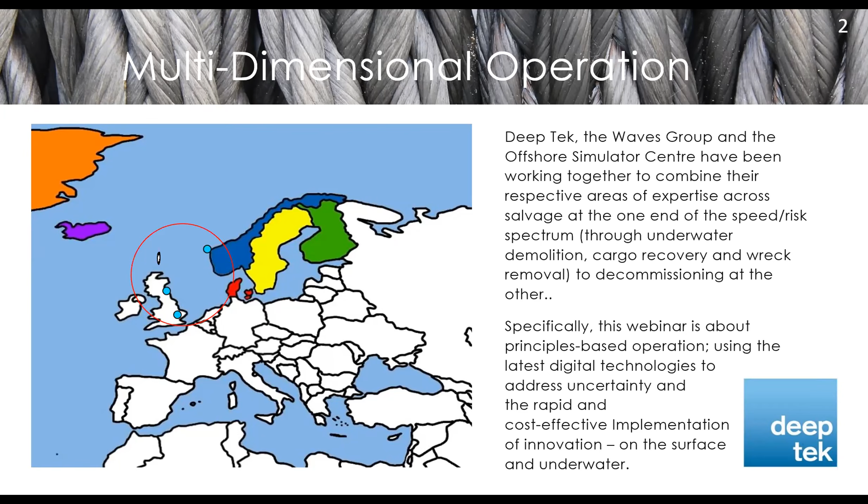But really what we want to do is show how salvage as an undertaking, with its basic principles—that it's of success, danger, and being a subject of salvage—really makes salvage an undertaking. It's like science, it's not just an activity, it's an undertaking. So we're going to take you back.

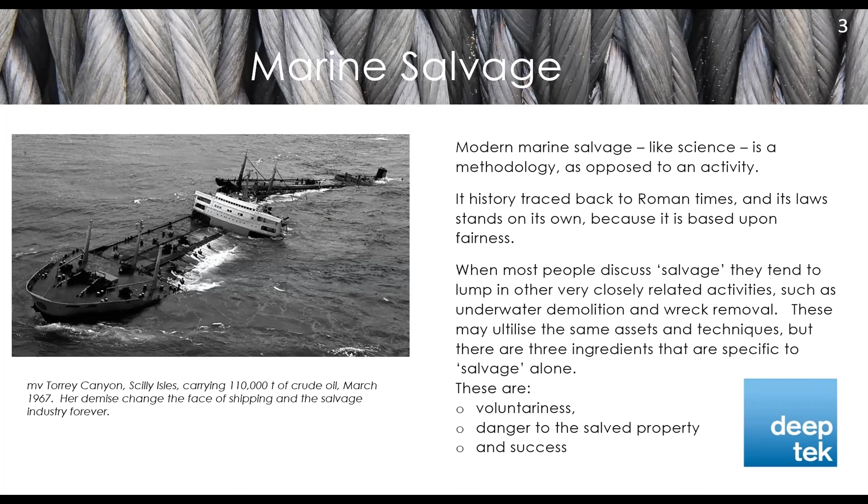This is a wreck called the Torrey Canyon. For those of you a little older in the tooth like me, this happened when I was a child. The Torrey Canyon, a tanker grounded on the Scillies in 1967, transformed shipping and salvage. It transformed salvage because Wijsmuller, the family company that responded to it, responded on no cure, no pay. And when the British government, when the RAF, after significant tries, bombed this wreck, they actually bombed the principle of salvage, in my opinion. But these wrecks are each taken on a case-by-case basis, and you can see how salvage changes over the years and is changing now.

And so in showing some of the past, we also want to show you the future. The Deepwater Horizon, again, is another wreck. Many of you will remember that from 2010, when she became a wreck—this is her being responded to as a casualty. She was responded to under the commercial agreement of no cure, no pay, and she is treated here as a ship. So you immediately see that for us, the oil and gas sector doesn't sit on one side and the maritime sector on another. We merge them together, and so the techniques you'll see on the surface and beneath the surface are merged as well.

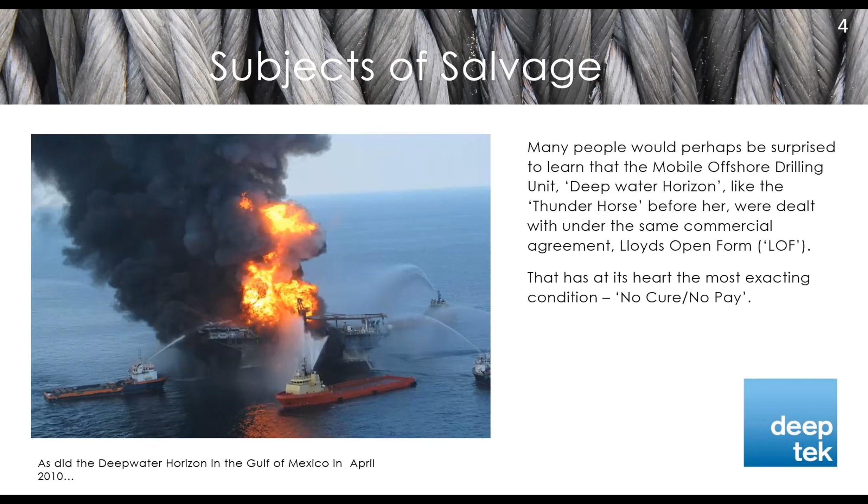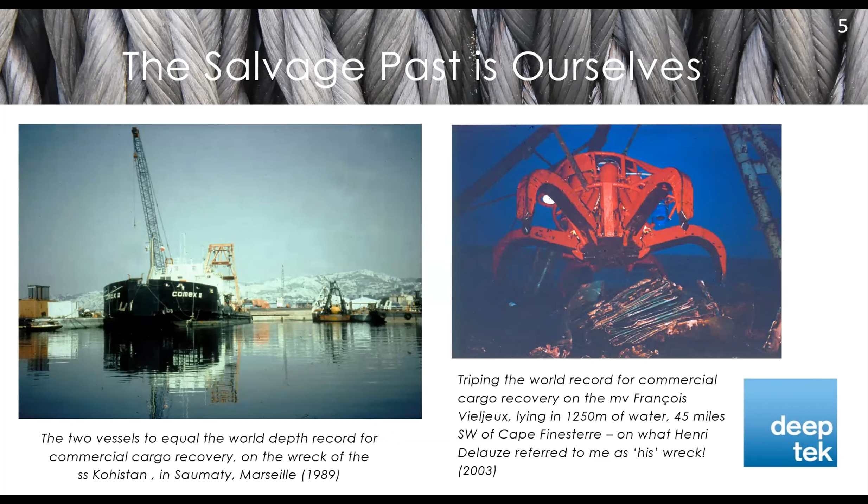My particular form of salvage has been cargo recovery. We've been quite a strange company. Our vessel, Redeemer, when we had our own vessel—she is the vessel on the right. With this tiny vessel we went on to triple the world's depth record for commercial cargo recovery. That was 1,250 meters of water, which was probably staggering enough, but it was also 45 miles off southwest of Cape Finisterre in the Atlantic.

And then we went on to work a wreck, finding it first—the wreck of the SS Persia. For me, that finding of a wreck was always very difficult. The Persia had three positions of loss.

She was sunk in 1915. So we first had to find our wreck, and from the positions we were given, that was anything that she may have lain in 2,000 to 4,000 meters of water. She happened to lie in just under

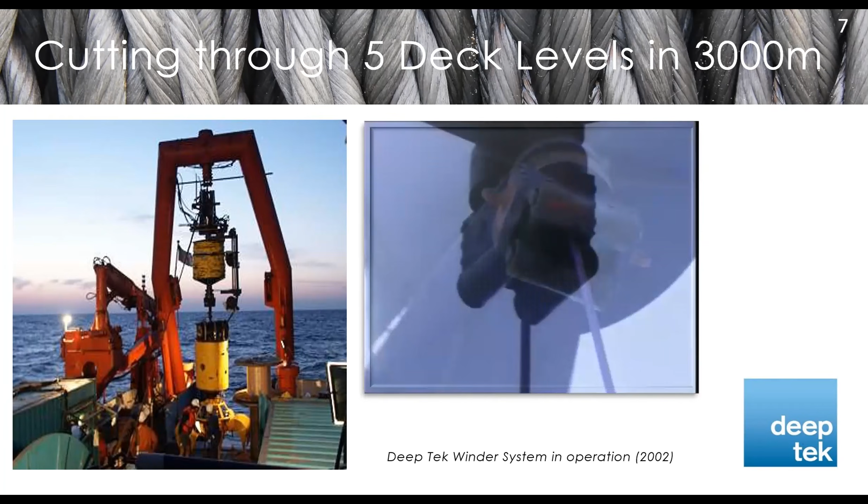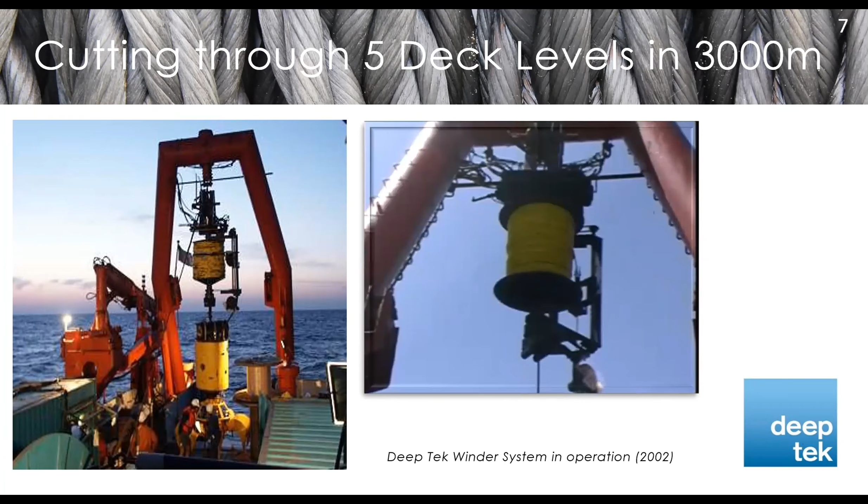This winder system was never used anywhere in the world before. We built it and got it working on the vessel. This is the use of high modulus polyethylene as a tension member, now 20 years ahead of where the oil and gas sector still is. What you see here is winding power and signals around that high modulus polyethylene, which is weightless in water, so that we can operate the industrial equipment on the left-hand side.

That grab has 200 tons closing force. In order to reach the bullion room of the SS Persia, we had to cut down through 5 deck levels and remove hundreds of tons of overburden to get to the bullion room, which was built in feet - 20 feet across, 8 feet deep and 4 feet wide.

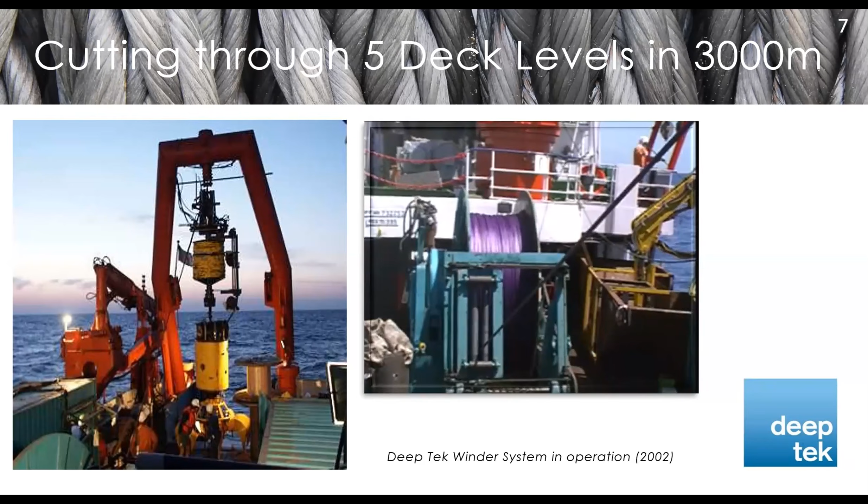Not only was this, in terms of technology, about being able to find this wreck and get our equipment to work from it, but even at this time - the beginning of the 2000s - to get the video images we got, we had to change almost overnight to single mode fiber optics. So you can see how having better information would have completely changed how we worked.

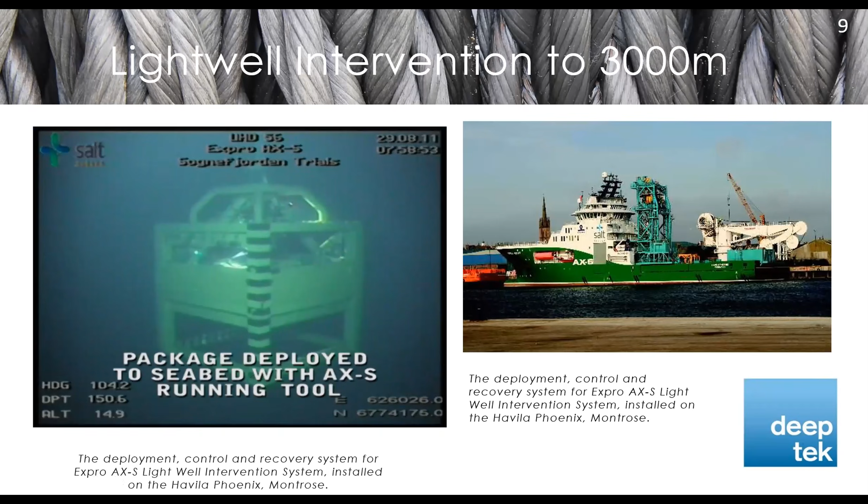So this is why I wanted to bring these 3 talks together. I'll show you on the left-hand side a very quick video, which shows how technologies meet together, as a company, as a salvage company like many others who work absolutely on first principles, and our technologies were

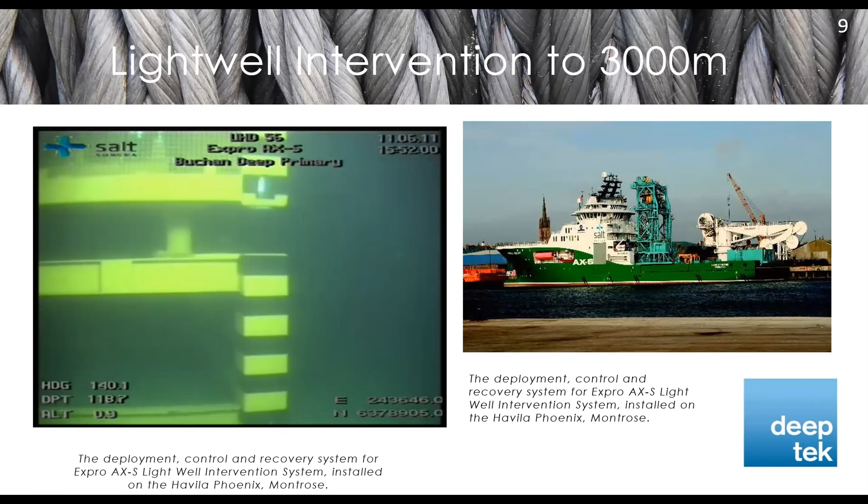taken and we became the contractor for a £10 million design and build contract for lightwell intervention down to 3,000 meters of water, which was the leading edge of oil and gas. So I really wanted to leave you and pass you on to Mark, showing that from salvage on basic principles, on very, very hard contractual agreements, it's absolutely married to innovation.

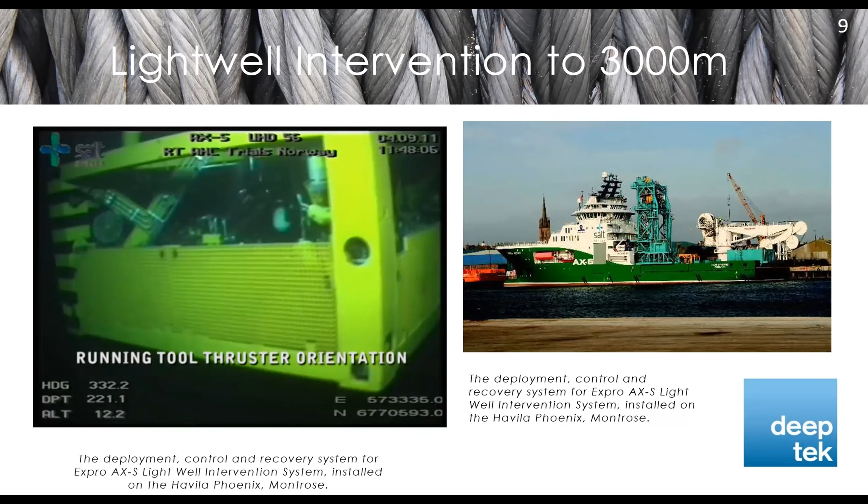But I would have liked to have the technologies that you're going to see next - it would have revolutionized our work on the Persia. And I'm just going to stop sharing now.

Mark. Hi, can everyone hear me there? Can you hear me, Moya? Great, okay, and hopefully I'm sharing screens as well. Can you give me a thumbs up that that's working?

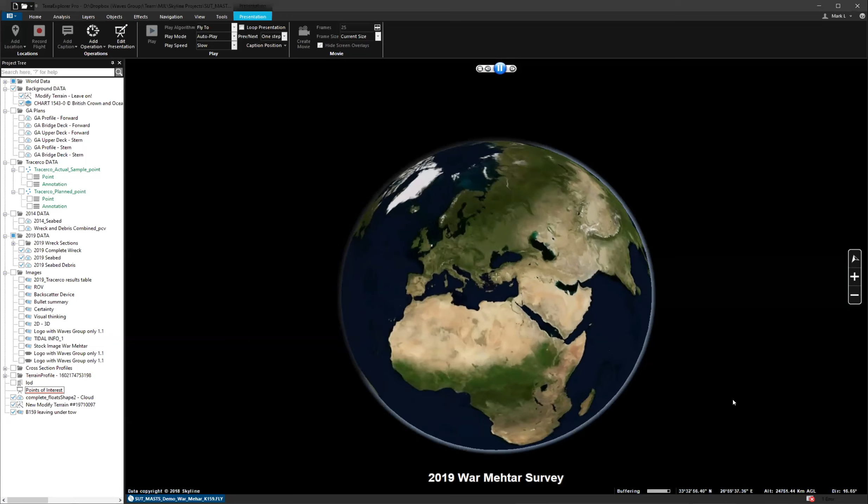Okay, so just carrying on from where Moya left off, what I wanted to show you today was a case study, if you like, of a number of wrecks. I'm going to start with a wreck off the east coast of the UK called the War Mehtar. This is a project we did for the UK MOD last year, and it was a so-called legacy wreck. It was sunk in the Second War, containing significant quantities of oil, or so we thought, and therefore was a pollution threat.

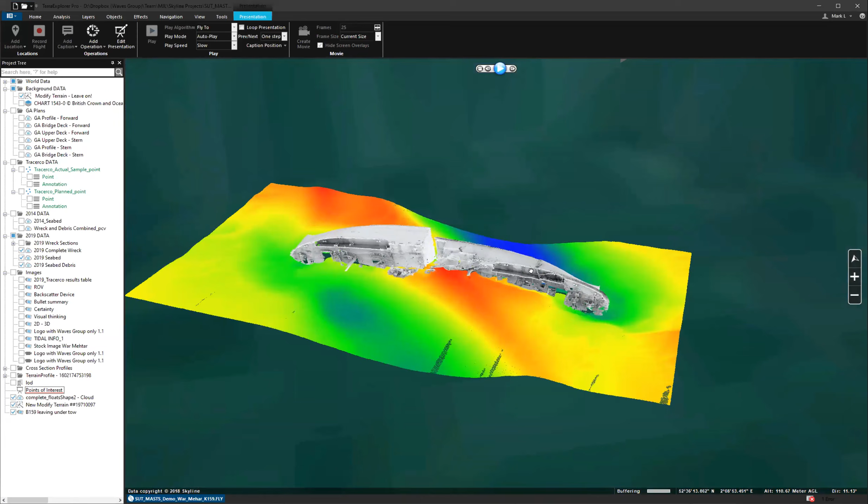So what I want to do in this presentation - I'm actually running a GIS package at the moment, so I'll just pause it - was to show you some of the techniques we're using for acquisition of three-dimensional data, and more importantly, how we're using that data for intervention strategy, for our ability to increase our situational awareness, improve communication and collaboration.

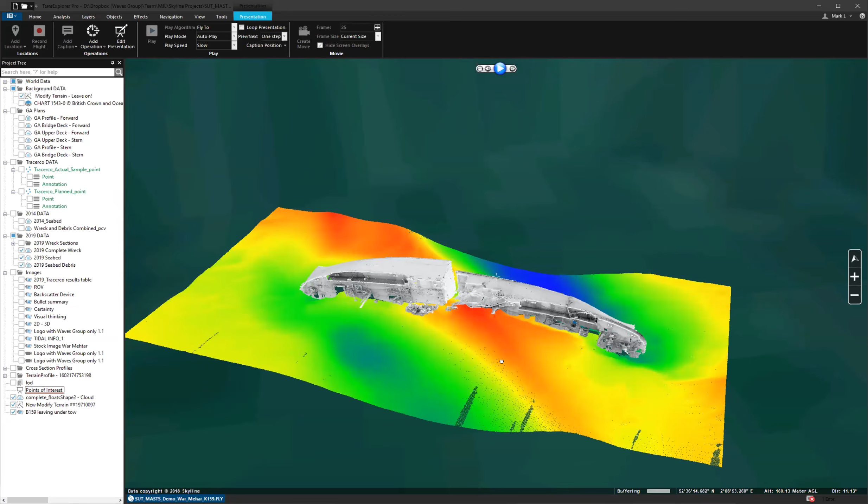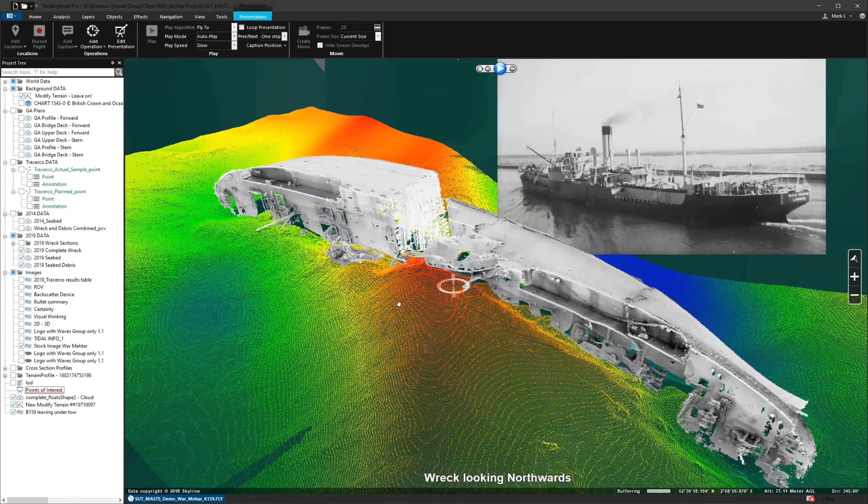So I'll just add in an image here, hopefully, of the War Mehtar. What we're looking at here is the wreck of the War Mehtar, lying on its port side in about 50-60 meters of water. The wreck is a legacy wreck which sank in 1941, thought to contain significant quantities of oil because when she sank she was more or less intact, having suffered a torpedo strike to the port side from a fast torpedo boat. She did sink with significant quantities of oil on board at the time, so it was always a worry that there was significant oil remaining on board, and therefore a pollution threat.

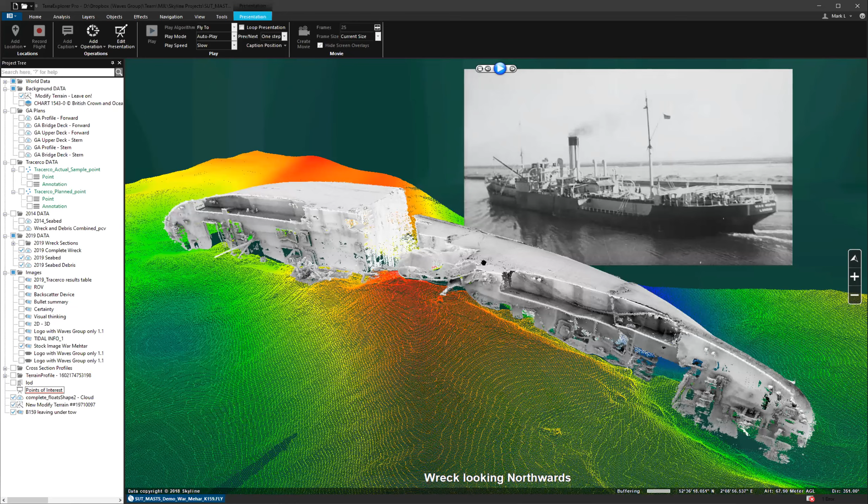If I then swim round to the other side of the wreck, hopefully you're getting this.

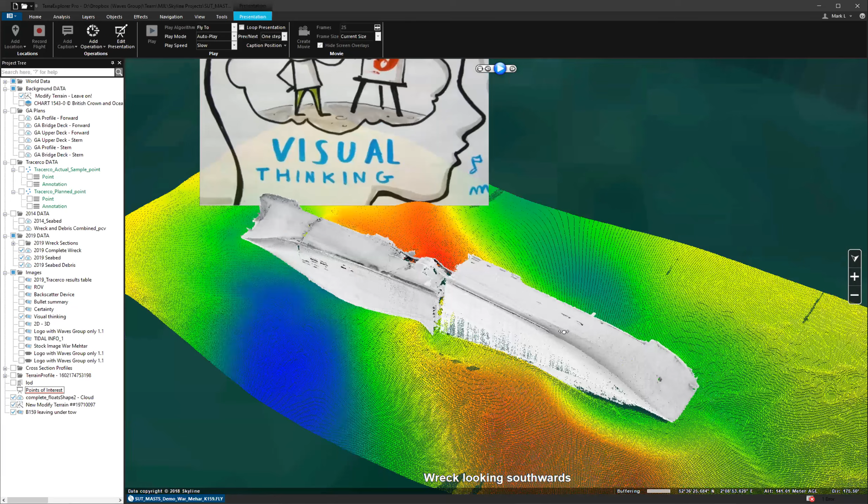I wanted to make a couple of points about this sort of data. We all, as humans, think in three dimensions, and that's no surprise, as we live in a three-dimensional world. Without me describing too much about how the wreck is lying on the seabed, the use of this three-dimensional data already gives you that level of understanding. In our profession, we're still making use of two-dimensional information in terms of static reports and the like, but it's only when we get into three-dimensional data that we can really begin to add value to our level of understanding.

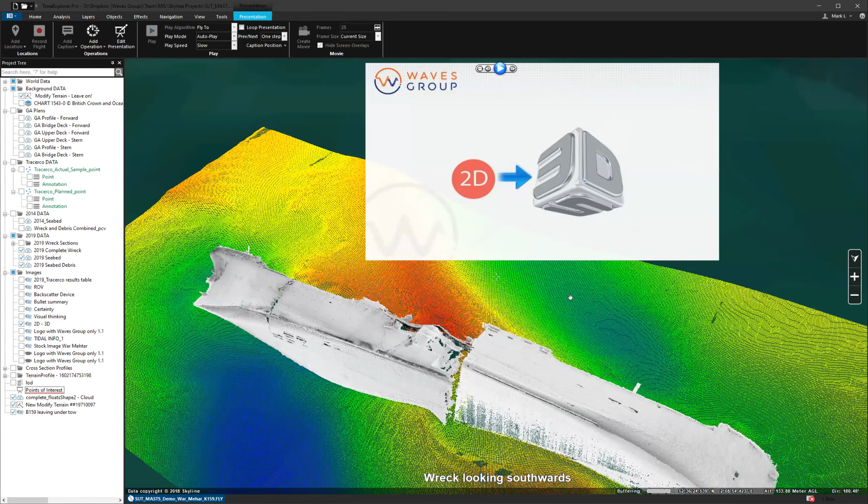In this particular case, without the three-dimensional data, we couldn't have planned the sampling regime that we undertook to find out if there was significant oil remaining on board.

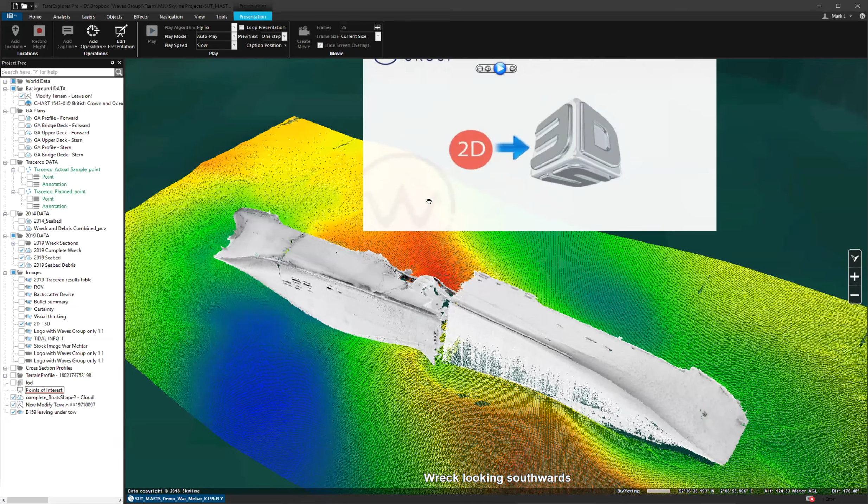The other point I wanted to make is about certainty and the value of this sort of data, especially at the beginning of projects, where we can essentially remove the water and have a good look around this wreck and understand it in a way not possible by any other means. That really does increase the certainty of outcome, because we can understand exactly what we're dealing with in terms of situational awareness.

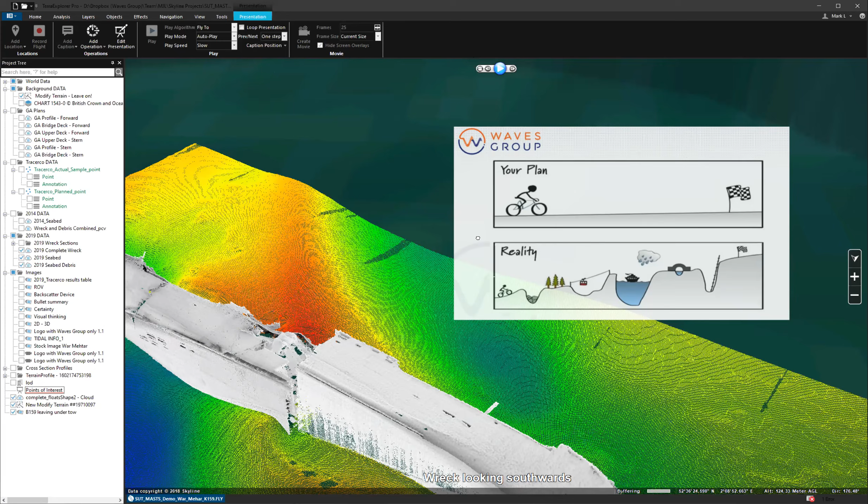In this particular case, the level of resolution was sufficient using multi-beam sonar. So here, what you're looking at is actually a point cloud data set acquired using remotely operated vehicles with a multi-beam sonar system. Because of the resolution of the data, we were able to accurately overlay GA plans on top of that data set.

That effectively has allowed us to position the areas of interest. I'm just going to pause that there.

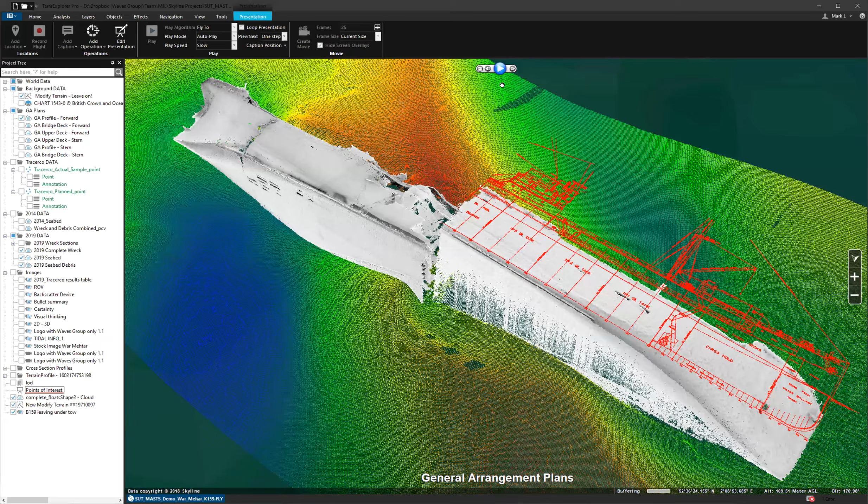In our case, we were interested in the oil tanks, where the oil was stored while she was afloat. She was a fleet tanker, as I've said. So here we're looking at holds number 4, 5, 6, and 7, and we were able to undertake a sampling regime.

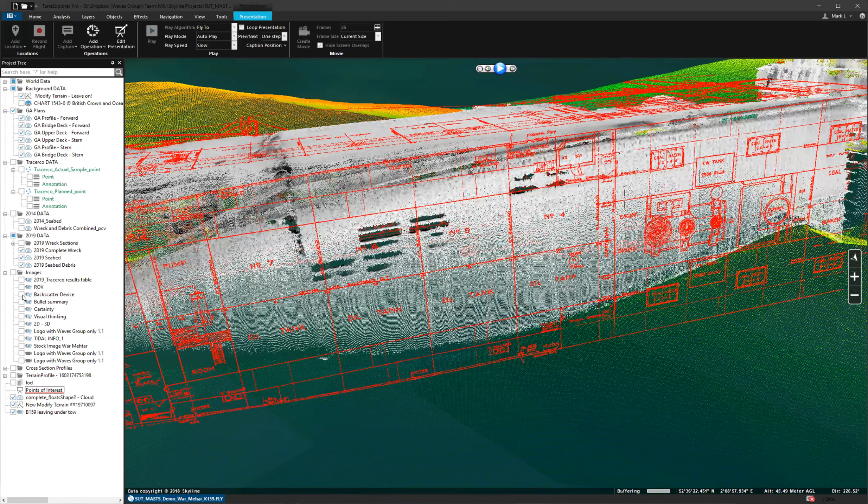If I just pop this image on here, we undertook a sampling regime using a neutron backscatter device handled by the ROV. But it was only because we had the high resolution data set and the GA plans that we were able to accurately position that device.

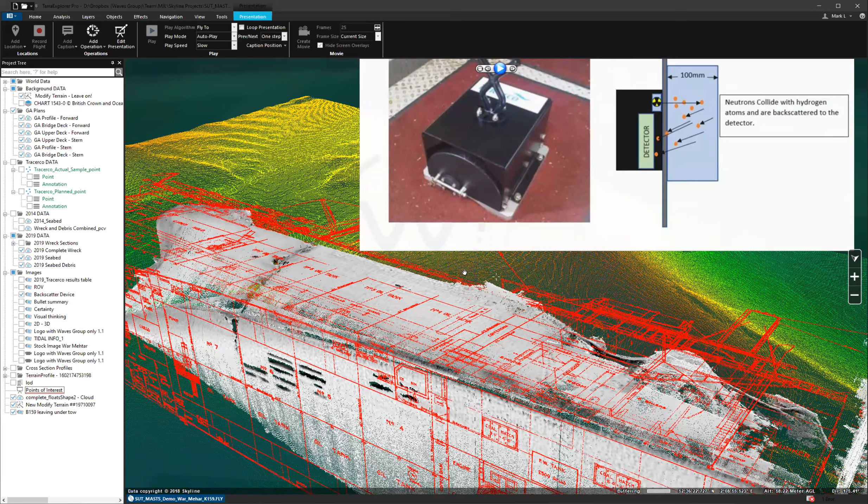I'm going to cut that a little short now since we're pressed for time with Joel, because even though we didn't find oil on this particular wreck using this sampling regime, had we found oil, we would have been into a whole different situation trying to understand cost and implications for getting that oil out.

This is where it would have been really useful to have all this data within Joel's simulation package, to understand the implications of all the different types of operations that would be needed, and to try costing those in a simulation package.

So I'm going to stop sharing there and hand over to Joel briefly, and then I'll be back to show more examples of this sort of data.

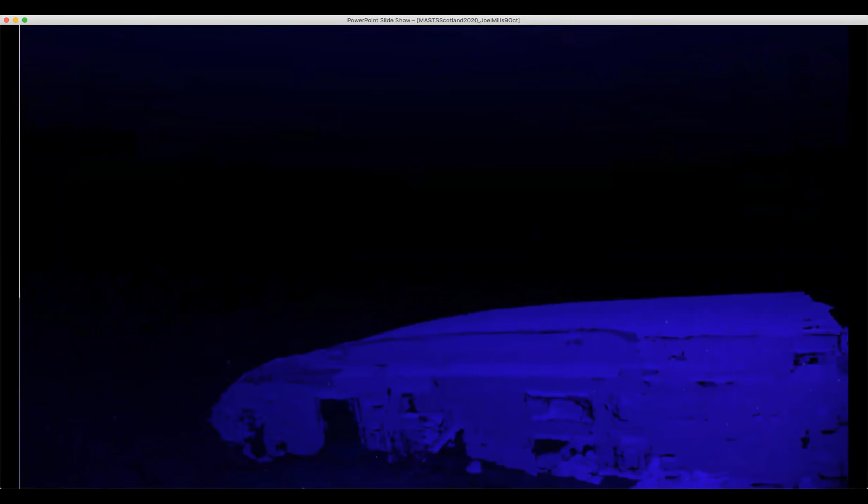So again, some pictures of the simulators, but what I want to start off with is Mark has been showing you some really good quality data acquisition, some really good point clouds of different wrecks, and he's going to show you more about that. The one he showed you was the War Mehtar wreck. Now, technology has been progressing a huge amount. Mark was able to give us that point cloud, and we were able to use some software which, within under an hour, converted that point cloud into a solid mesh. A point cloud is basically like a ghost showing you where everything is, but it's just a visual. We can turn it into a mesh, which makes it a solid object that we can start to look at and do things with.

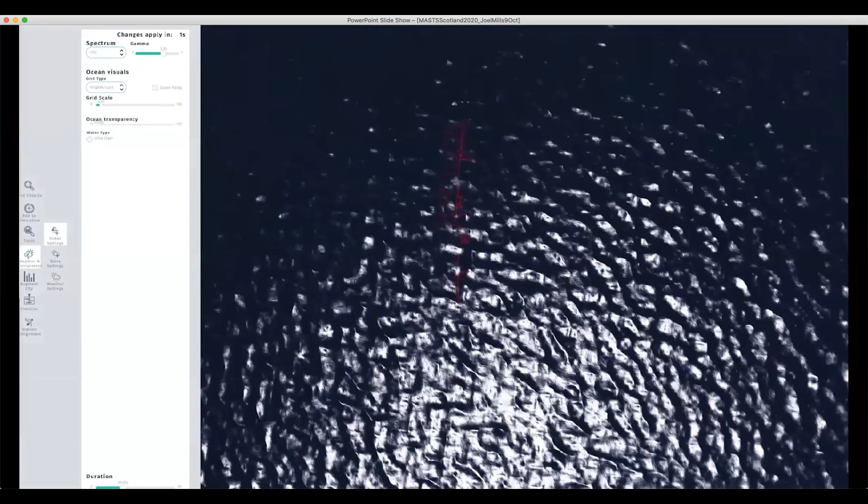So we're able to put this in the location we needed, directly on the seabed. We put the vessel into place, and then overlay all the different bits of equipment we want. We're then able to use our sandbox product, which we've developed for working with this and building up simulations at very high speed. It's basically like building Lego blocks, but you can build in things. So in this example, we've thrown in an offshore vessel, and we're going to show how we do what Mark talked about and understand how we go down and do observation on that vessel.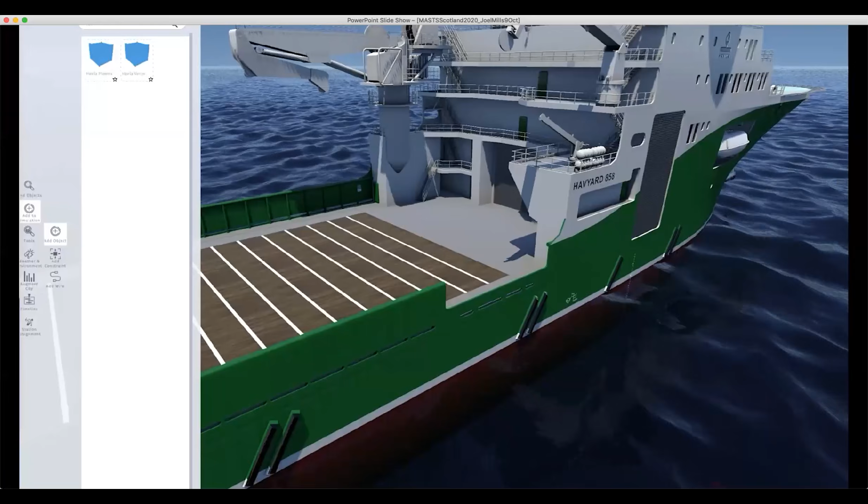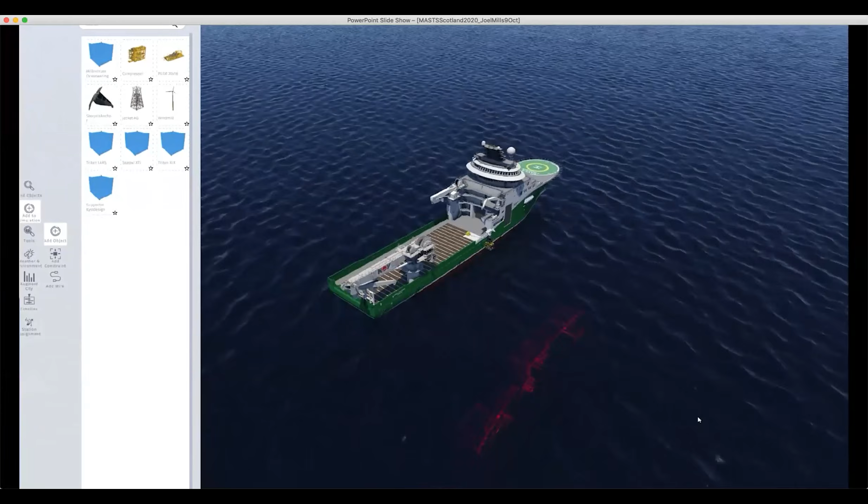So we pick out a large system with an ROV on it, and we place that on board this vessel in the right location. We're able to move it around exactly like a Lego piece, placing it into place. The minute we place it, it goes from that ghost view to a solid view, and all of the physics becomes correct. So the forces coming from the waves to the vessel are correct.

And now what we're going to do is show some situations to understand how this vessel would perform in different wave conditions, different directions of current, and wave heights, to be able to do that inspection operation with an ROV. So we can quickly, using simulation, understand the possibilities of what can be done in one place or another, and what sort of vessel you need to do that.

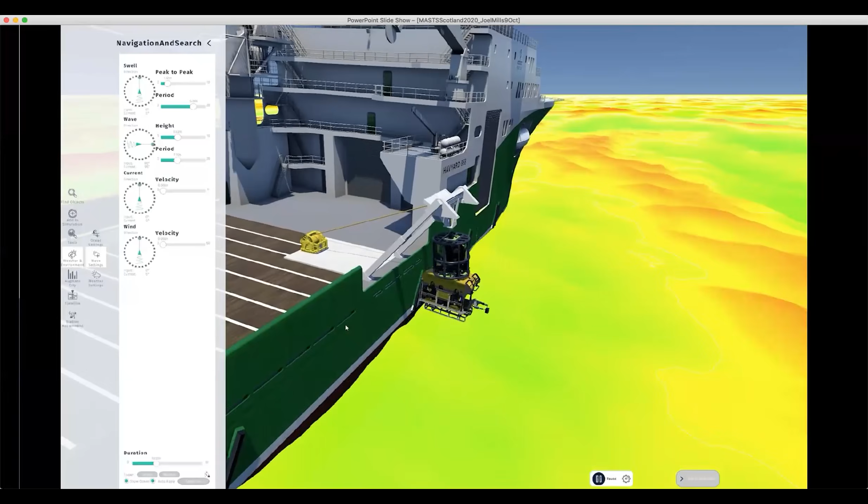So here we're showing the waves going up, and actually we put the waves too high in this example, at 90 degrees to the vessel, so you start to get a real roll of the vessel. Suddenly you see that ROV swinging around so much that it's actually bashing into the side of the vessel. Now that's not a condition you'd ever want to launch that ROV in, but we're just showing how we can control all of the attributes, and this isn't just an animation, it's all based on real physics.

We have over 100 different inputs into the waves here, which give the forces to the vessel, and the hydrodynamics are calculated there, then feeding the forces through all the systems to the launch and recovery system for the ROV.

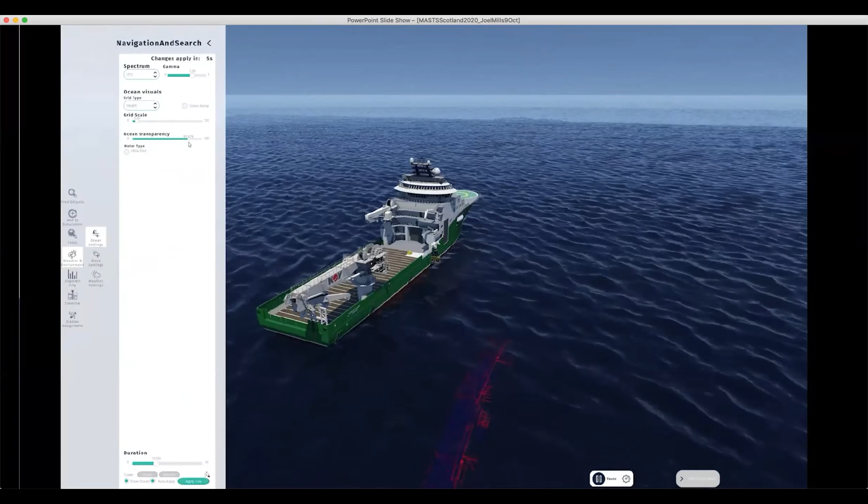But the wonderful thing with simulation is we can do things that aren't possible in real life. So we can do what we call augmented simulation, where we're able to change things, like turning the water off so we can see exactly what's going on. This is a view you'd never be able to have in real life, but in the simulation you can do this to really understand what's going on.

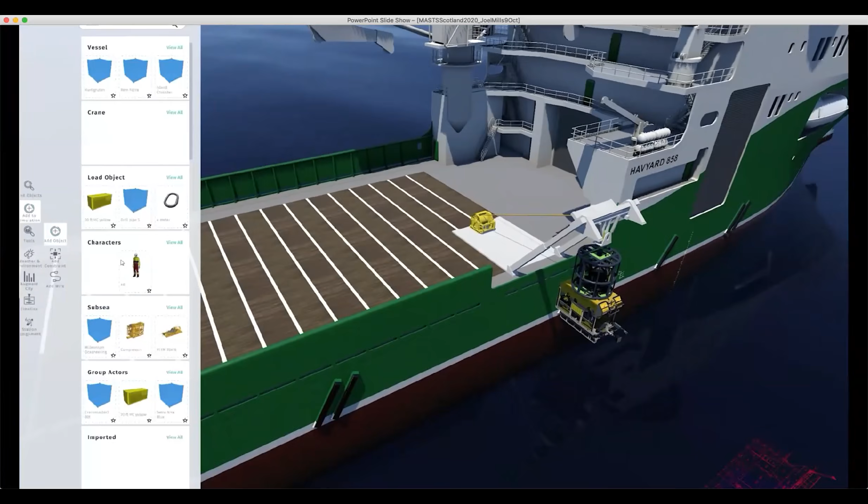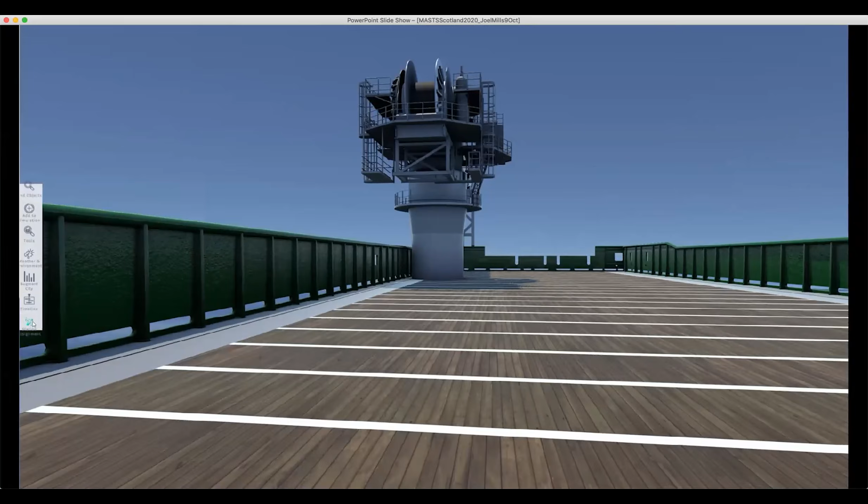We can also go down to the perspective level of a human, place somebody in, and even take control of that person, so we can understand exactly how this will be from the human's perspective, which is very important. We're able to walk around, take control of that person, and step into his shoes, so to speak, and look around. This deck of a vessel is completely empty, but we can assign ourselves to that person and look at things directly from that perspective, understanding exactly how an operation is going to be performed. So we're able to look at things from the detail of the people involved.

We're able to take control of any of the objects, so we can jump to the vessel bridge, we can jump to the ROV cameras, and we can understand things from all of the different perspectives. But we can also take this world view where we're able to fly around and see things from a different direction.

So we've lowered the ROV through the splash zone. I've actually skipped a bit here because I didn't want you guys to wait while we did all the lowering. So we start lowering the ROV down, but in this case we suddenly jump to the point where the ROV is down by the wreck, because I wanted to keep the video short enough to show what's going on.

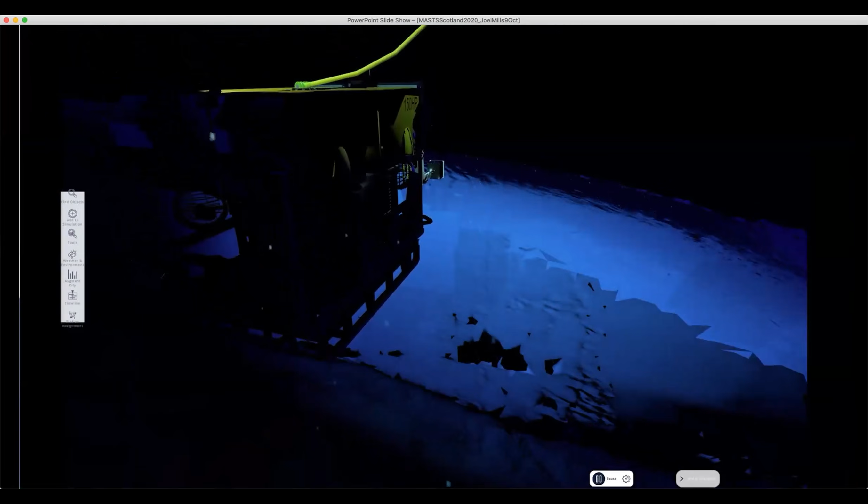So now we're the ROV, and we're coming through the water, and you can see that we're just using our spotlights to pick out just the area of the wreck we're looking at, and we're able to approach and go into that wreck.

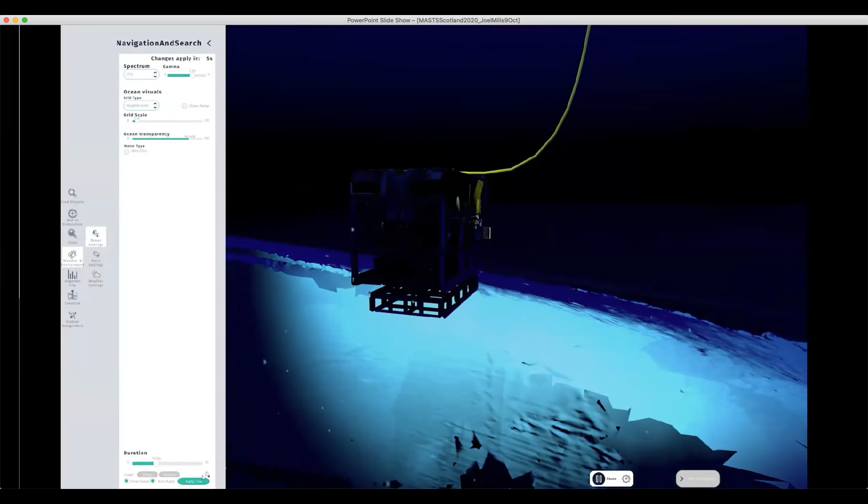We're also able to go in and change the visibility of the water so we can get a better idea of what's going on. So we can just go into our settings here, and we can make that water a little bit more transparent, so we're able to understand what's going on and really get a better view of the full situation, better than you'd even have in real life in this case. But it gives you an idea to understand what's going on.

Now, as Mark mentioned before, one of the objectives here in the first place was for this ROV to go up to the side of this vessel, place this scatter device on the side of the vessel, and take a reading to see if there was oil in these tanks or not. And then if there was oil, it would have to be about how it was pumped out. So that was showing that.

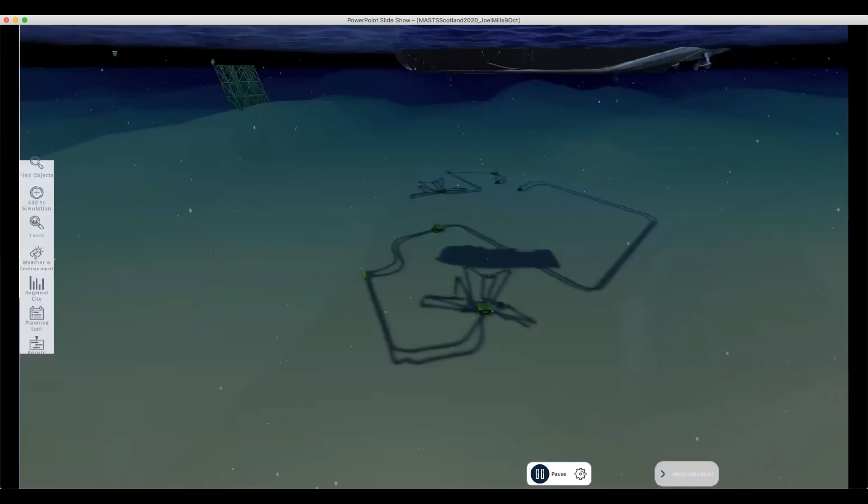Here we're showing how in the simulator we can have all sorts of data, and here we're showing how we don't just do digital twins of offshore, but we do digital twins of a whole world. So we've got cities, and we've got a number of different cities. We do work for the offshore fish farms, we obviously do a lot of work for oil and gas. If it's installation, decommissioning, or just operation, we're able to look through all of that stuff, and we're very used to working in building very complex digital twins of subsea.

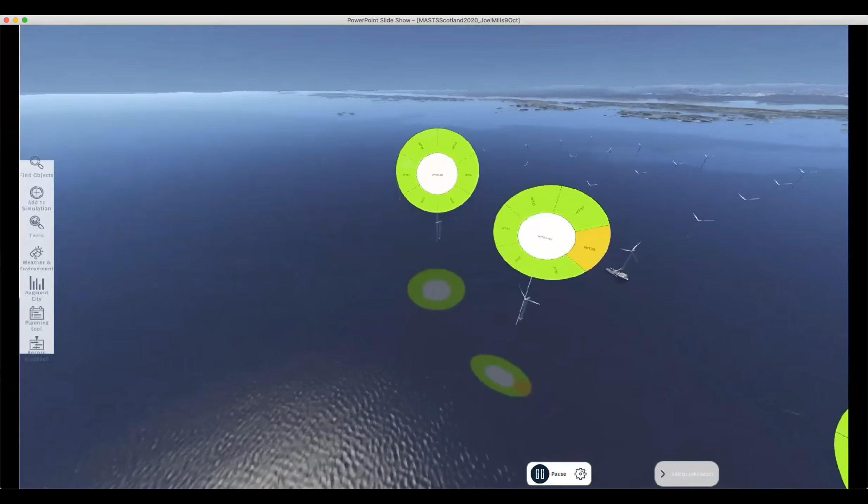We also work with the renewables industry, so we're working a lot with the wind industry, and here we're not just looking at the installation, but we're also looking and understanding how things are over time. So we're able to augment data. In this case, you're looking at wind turbines, and we're able to see the efficiencies of the wind turbines over time and really understand all of the different details of what's going on there, so we can have a really good feedback.

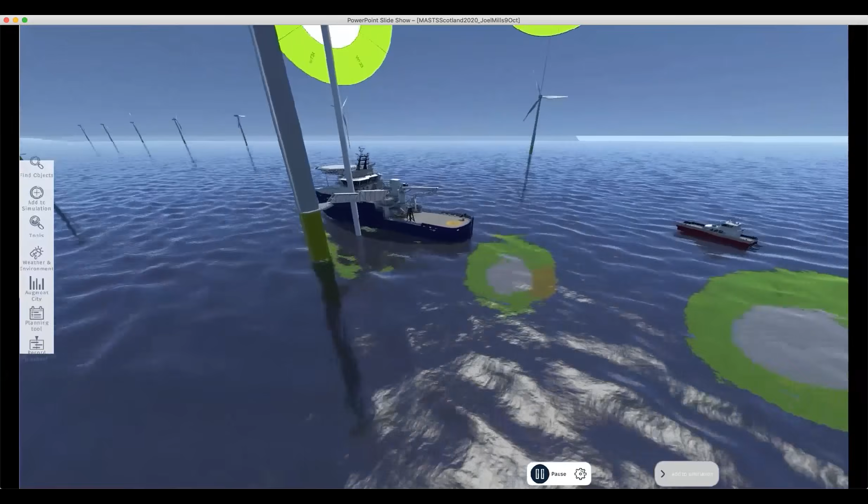So we're able to link this into live data and really follow things which are going on live. So if we're talking about a wreck removal, we'd be able to take in the real weather conditions for exactly that point and put in the wave conditions, so we could follow the operation live and maybe provide remote support to help with things.

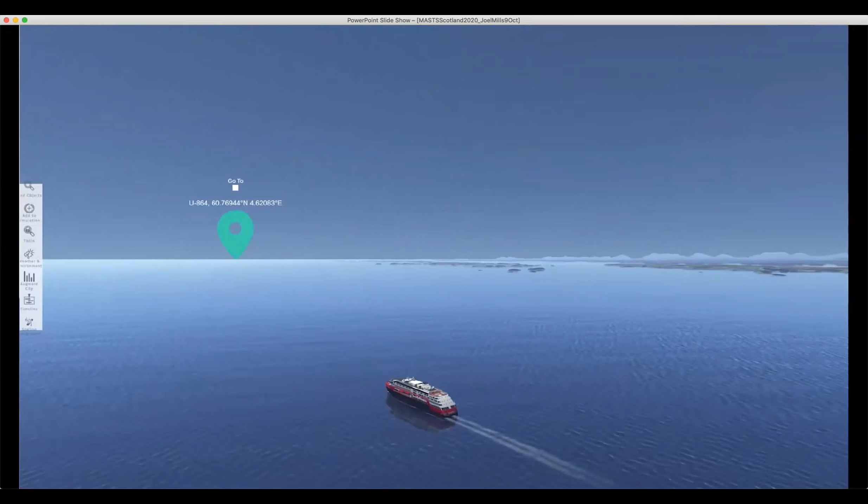But the reason we've actually picked Bergen here is because we wanted to use this as an example. Just off the coast of Bergen, we're just flying past the coastal steamer here, but just off the coast of Bergen there is actually a sunken submarine, which is a project they need to look at how they will do, or if they should at any point do a removal. Now, this isn't actually the submarine which is off Bergen, this is the submarine which is off the very north of Norway, but we just put this in as an example.

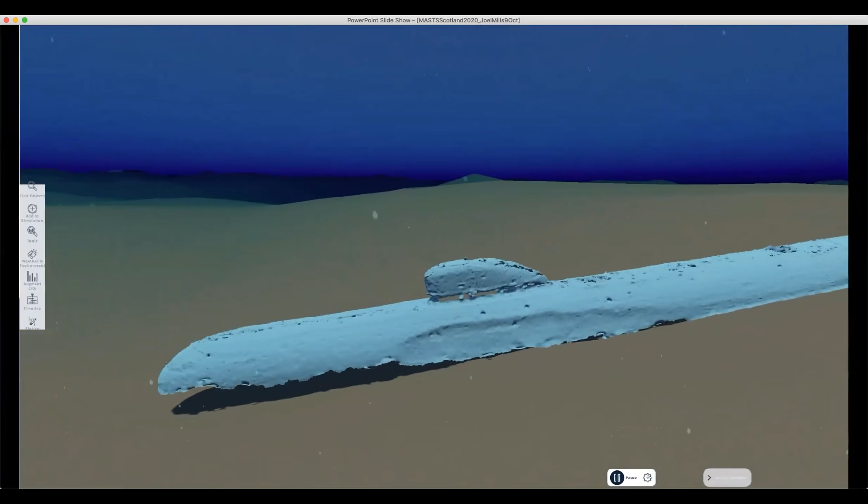But this is a classic example where we've brought in a 3D model, we've converted it to a solid model we can work with, and then we could quickly use the simulator and like with Lego, build up all the pieces to understand how or if we should do any sort of removal and how we could go about doing that. So I really wanted to finish off on the submarine there to basically just give us an idea and a taste of what could be possible.

Now, the whole point of simulation, as I said at the beginning, is linking humans to machines. And the reason for doing that is basically breaking down these barriers, being able to understand and do things in a way which isn't possible today in other solutions.

It's also to look at new technologies. The biggest blocker for new technologies is not knowing how they're going to work and the time scale it takes. If you're going to make a real prototype and test it out in real life, if you're lucky, you're able to do that in a year. In a simulator, you can do that in 10 minutes. You can go through 100 generations of a prototype in a simulator in a few days, which would take years and years to do in real life.

But the biggest driver with all these things is obviously time and cost. Within the work we've been doing in the past, we are saving huge amounts of time and cost because we're able to understand the best possible methods to do things. The cost of doing something in a simulator compared with the cost of doing something offshore is not even comparable. So we can test things out very quickly in a simulator, find better solutions, and really streamline those processes. So that was really all I wanted to say with my little quick taster of what we're working with.

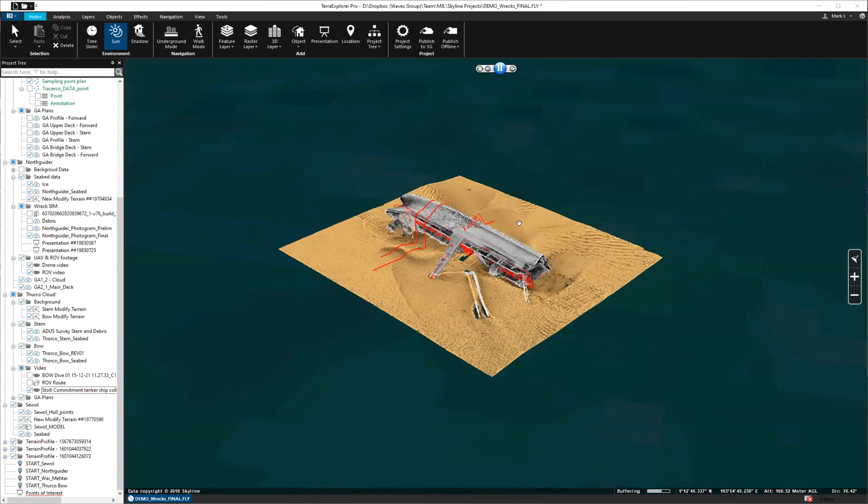The project I'm looking at here was a wreck we worked on some years ago, where in the Singapore Strait a vessel called the Stolt Commitment, coming out of Singapore, collided with a vessel called the Thorco Cloud coming out of Batam. The Thorco Cloud ended up in two sections on the sea floor, which you can see on the screen now. The stern section is bottom right, the bow section top right, about 1,600 meters apart. We undertook a full high-res multi-beam survey using ROVs. As you can see, you get an immediate understanding of the situation that you just couldn't get any other way.

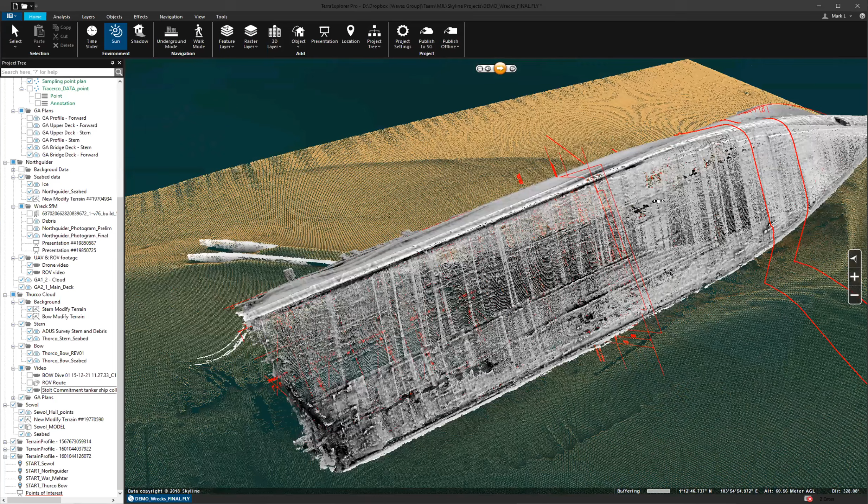And as I said, we're running this in a GIS, a geospatial environment, so immediately I'm able to undertake measurements, for example. So immediately we've got an understanding of this thing we just couldn't get any other way, and that really helps inform all subsequent operations, in this case the full wreck removal.

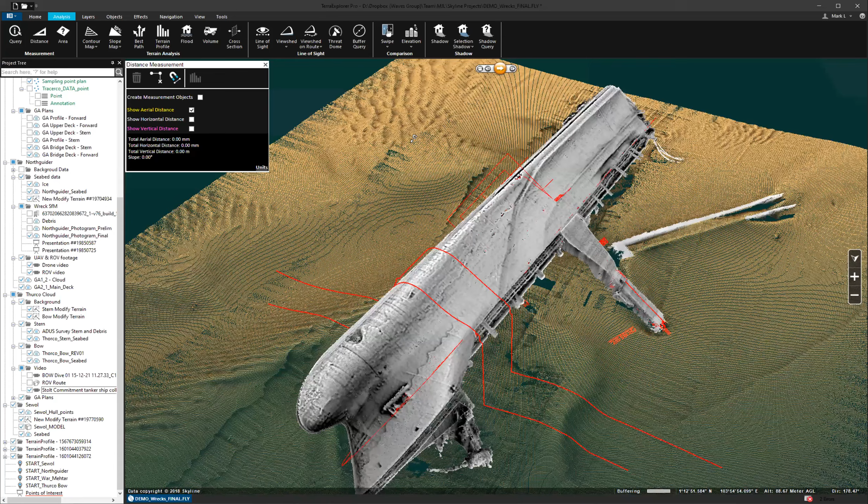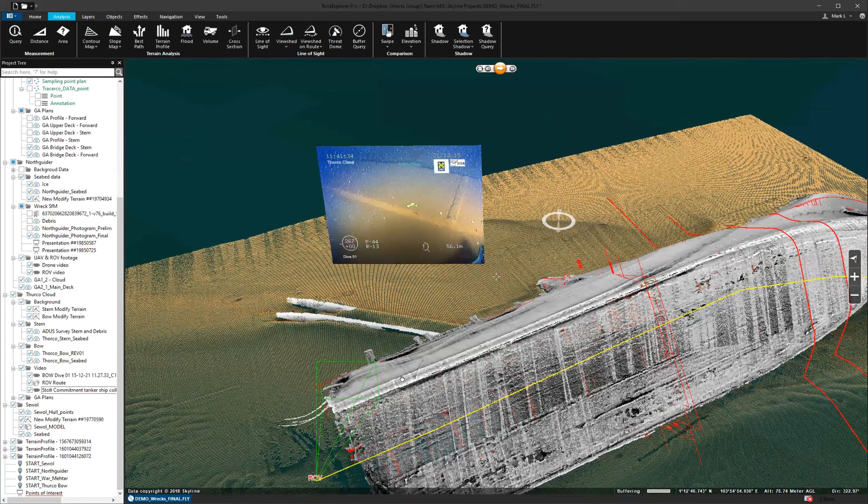So that's the bow section. We were also able to place in context ROV footage, and we can see here an ROV video image being tracked along. I'll just restart that route. You can see how we're using the nav data from the ROV to put the ROV footage into context, so the level of understanding about what we're dealing with is much higher in that instance.

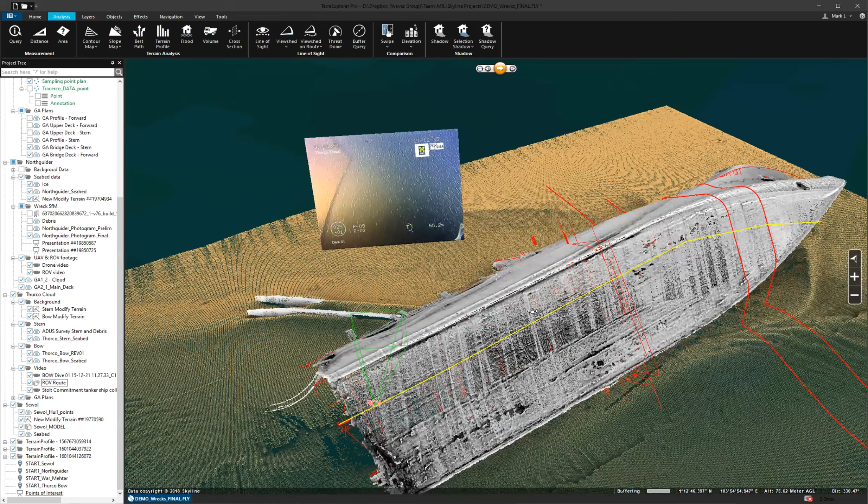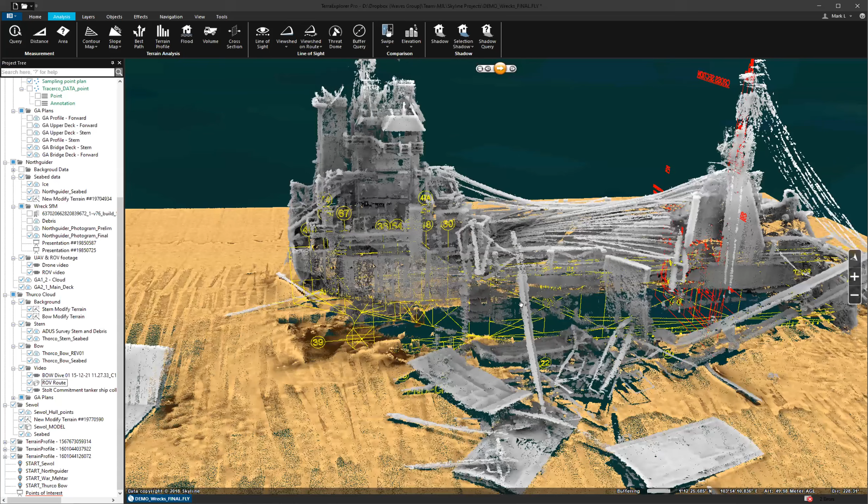If I whiz over to the stern section, this is about 1,600 meters away in about 50 meters of water. Again, this full multi-beam survey was done to inform the wreck removal process, and in the first instance the oil removal process. What we've done here is overlay both GA plans and tank plans to get access and to understand geospatially where the bunkers were and what the task list would be in terms of time and cost to remove all the debris and undertake an oil removal operation. So the data was really valuable for that quantitative risk analysis process, to feed all this data in. Without that level of information we'd really be flying blind in terms of the planning process.

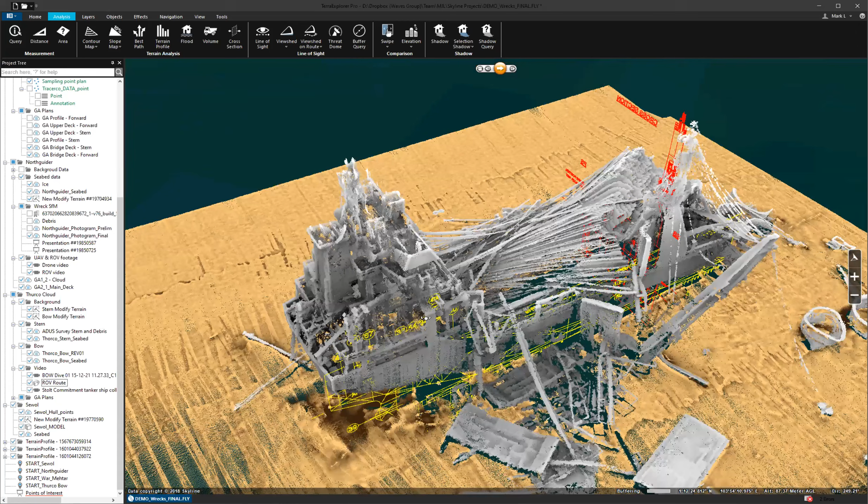This is all the cargo, by the way, that you can see spilt around the wreck. That's all railway track that's come from the bow, largely, and spilled over onto the stern section. You can see the details on the transom as well, the damage as the stern hit the sea floor. So a lot of forensic evidence in here that was useful in understanding what happened and when, in this particular case.

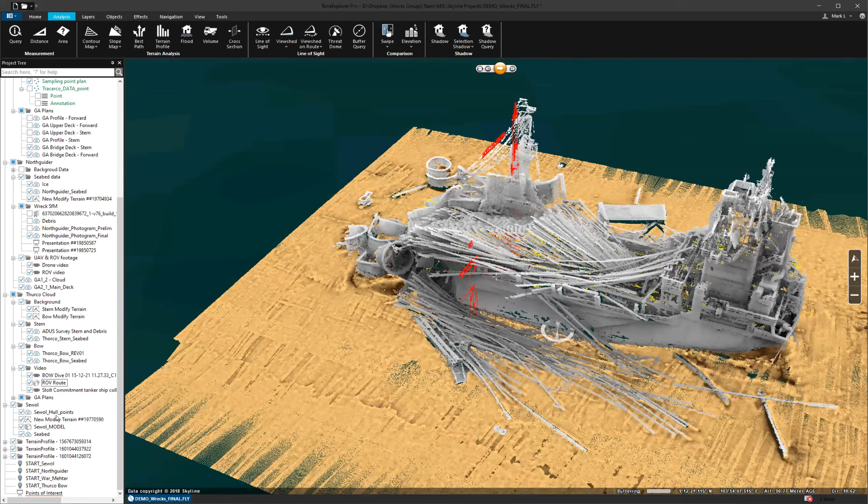I'm also going to fly now to another example, but this is above the water, because I wanted to make the point that we're not just dealing with stuff subsea these days in terms of data collection. I'm going to fly off to another example of a project we completed this year. Where are we? Which is up in the Arctic.

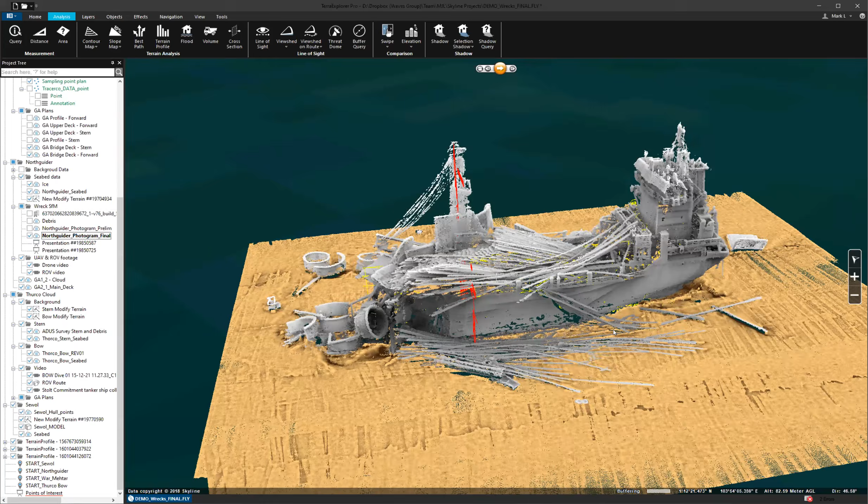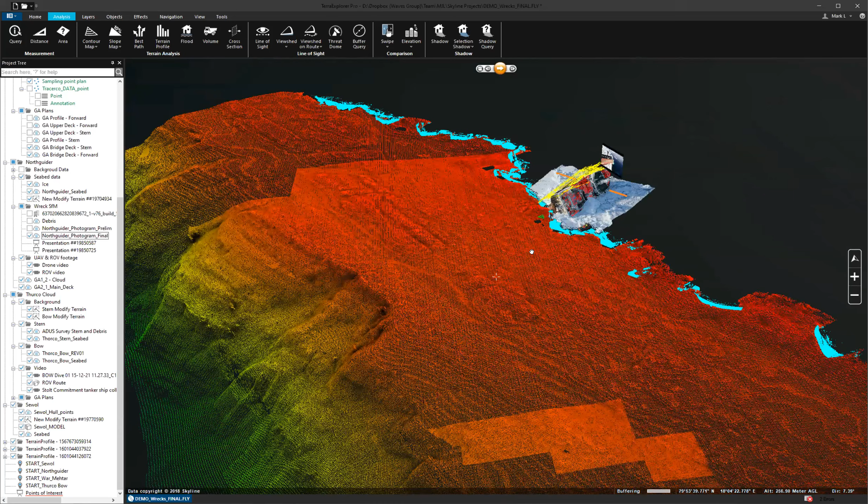This is a fishing vessel that went aground in the Arctic. We did multi-beam bathymetry. Again, back to this point about situational awareness, what can you do to, especially in a challenging situation like this, understand the nature of the seabed next to this casualty, but also the casualty itself, which in this case was a grounding, and the vessel was up above water on the rocks and ice. What we did here was fly a drone for about 40 minutes or so, and then using that drone footage we were able to create a three-dimensional model that you can see here. Just turn off the GA plans. This model was created purely using photogrammetry from the drone footage, and we ended up with a metrical model.

Again, as you saw before, we were able to measure distances and do cross sections and get an understanding we just couldn't get any other way. And I mentioned the challenging conditions - here, for example, we had issues with polar bears. Just being able to look at the casualty in this way was very instrumental in the planning and the eventual removal. This vessel, by the way, is now completely gone, and that was completed just earlier this year by Smit.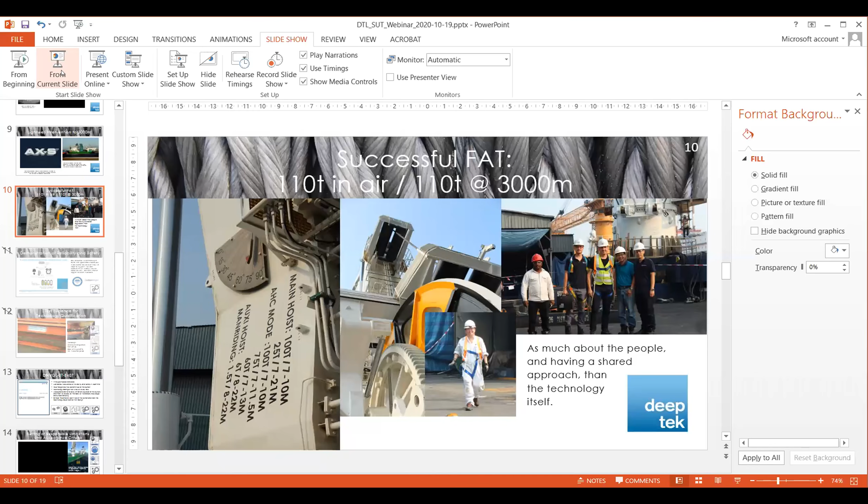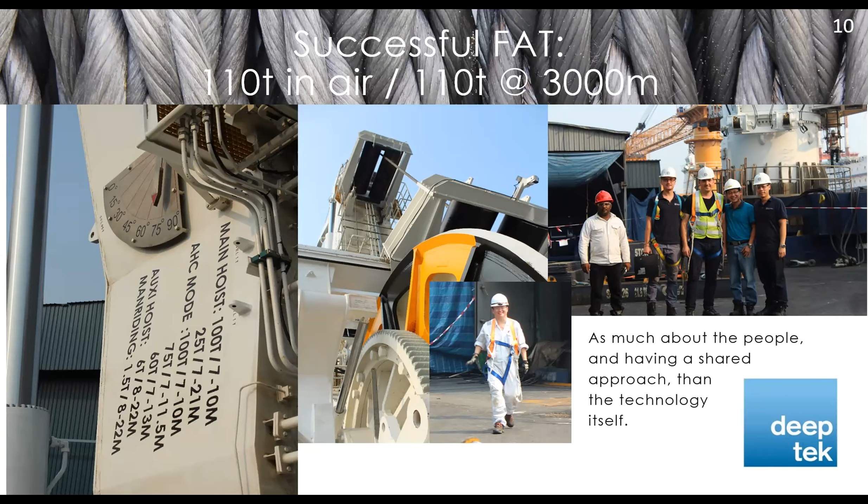From current slide, okay, we saw the Havila Phoenix, she's not the only ship but she's a very popular one. I wanted to pull matters together. There was a question earlier about taking the data off the images. This was a piece of work that put what we'd learned regarding using synthetic filament rope into products taken into the oil and gas sector, and Deep Tek was the first company to bring out its technology in synthetic filament rope cranes anywhere in the world. That wasn't because we were the best engineers in the world, it's because of our salvage background, and we were able to use the DNVGL standard, a first principles based standard.

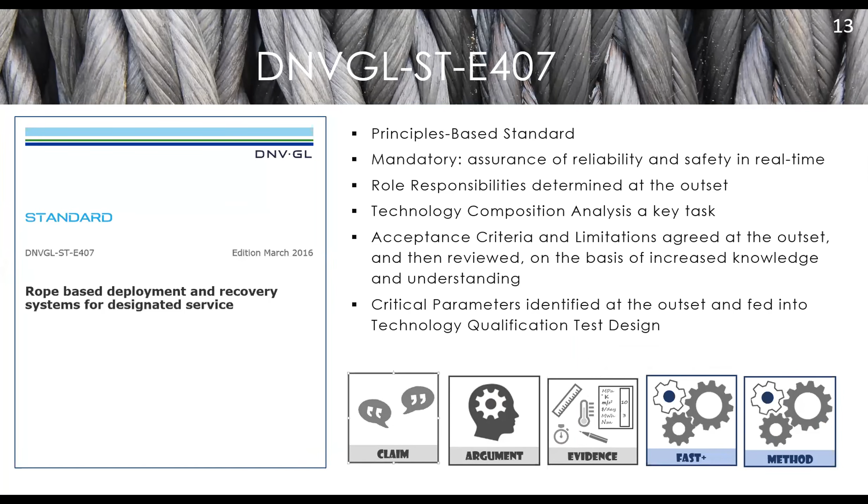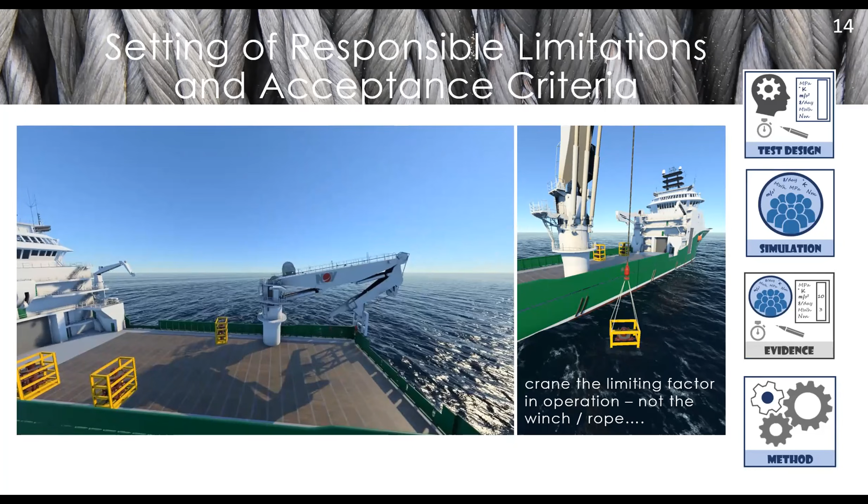So this again is the point I'm wanting to make, that salvage doesn't sit on its own, and its ability to innovate and take in new technologies really expands the frontier for innovation. This contract was undertaken in Singapore, you can see this is us. This is the first time I used the offshore OSC simulator in Norway, about 5 years ago now. What it showed us was that it wasn't the lifting system or the rope that was the limiting factor, it was actually the vessel itself. So it's so important to have this holistic picture, and what the simulation allows us to do is have a systems approach.

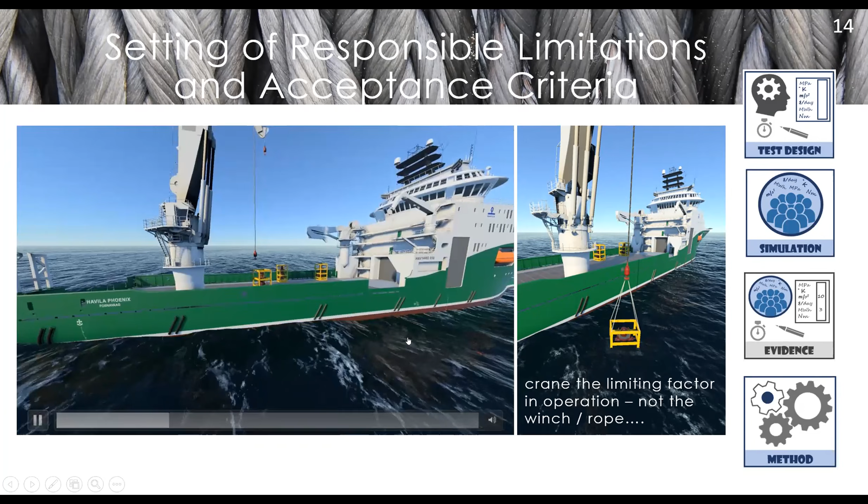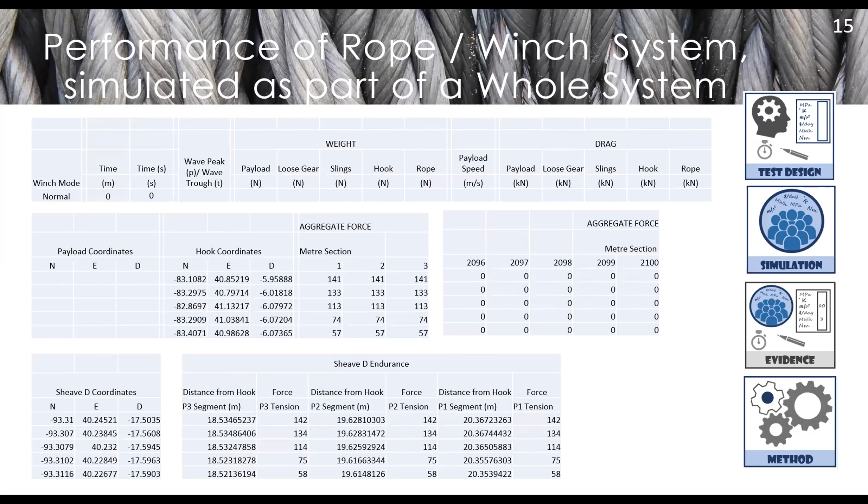The question was asked about data - this is data sets that we've taken out of the simulation so that we look at the load, and this allows us to plan. As Joel said earlier, the ability to look at multiple scenarios is absolutely essential, so it's about getting the right data in.

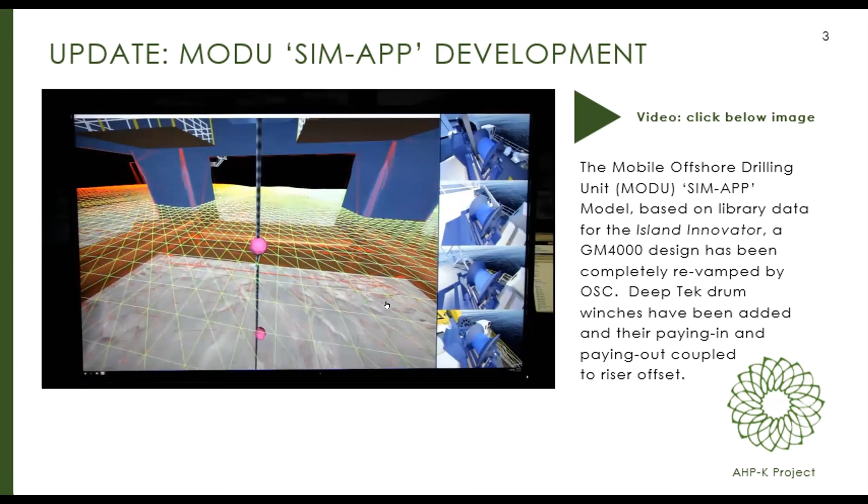This takes us back to the concept of working equally in what people think of as the oil and gas sector. This is a mobile offshore drilling unit where we're looking at the riser motion, and although we're looking at winches, we can see the whole system working. One thing I wanted to leave you with is the ability not only to get actual on-site data underwater, get it in the simulator, take the COA, take the measurements, but between people putting their technologies together, we can get a whole systems approach. So that was the work there.

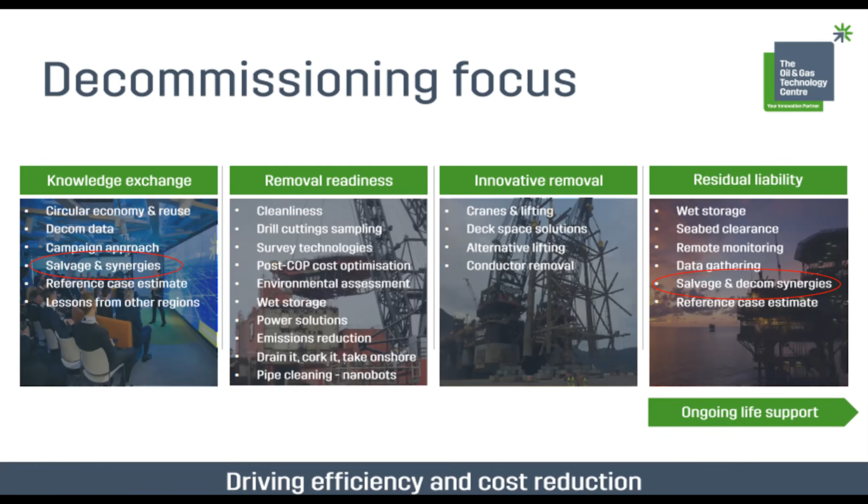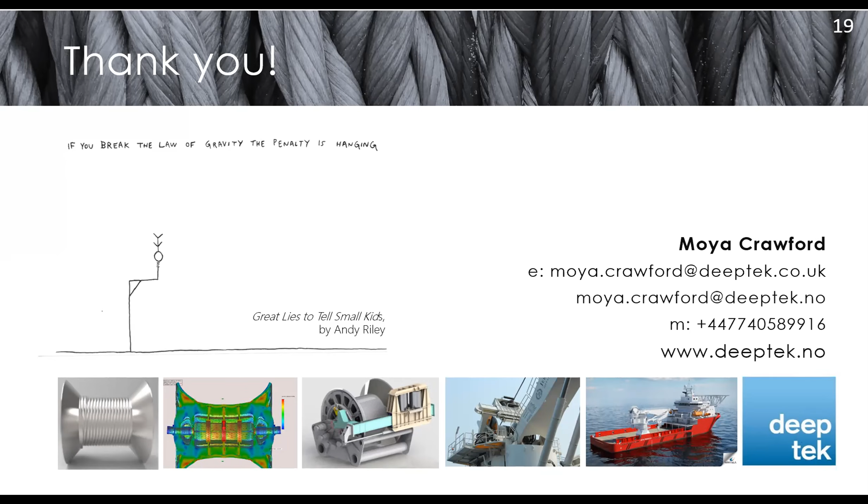Going forward, this is just really a taster. What we're all planning to do in the new year is put this actually into VR. So what we'd like to do with what people have seen today, if they're interested, is in the new year show what we're doing in VR. Our aim as companies working together is to do what we've shown you essentially in wreck removal, bring forward Mark's work and actually do that in real time - real time for salvage. That will really be the acid test of bringing the philosophy and the technologies together. But as Joel said, it's all about people. So that's me, I'll stop sharing and go back to Steve.